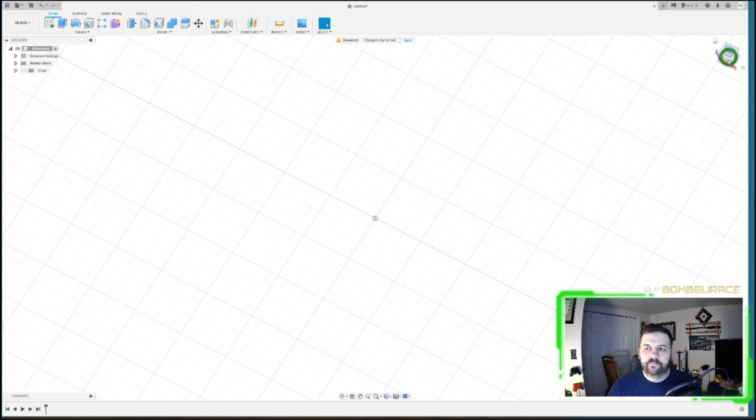So part 1 is just focusing on the sketches. Right here you probably would have came in with it looking like 360. We've got this cube on the right, you can switch and move anywhere you want, but again we're just focusing on the 2D sketch right now. So click the top, you need to rotate it whichever way you want. It doesn't really matter, but click top, and try to keep it relatively the same.

Come over here to our design side, we're going to create a sketch, and this brings up the X, Y, and Z panels. But again, we're just going to be on top, so that's all that matters. We're going to click that button, and that gives us our plane where we're sketching on. So then up here shows all the sketch features we have, anything we can create, modify, and constraints.

So I'm going to teach you everything that we need to know for our design today.

We're just going to start with a line. While we're here, Fusion 360 does a really good snap grid feature. You can turn it on or off, however you want, but it'll snap on each one of these points on your grid line.

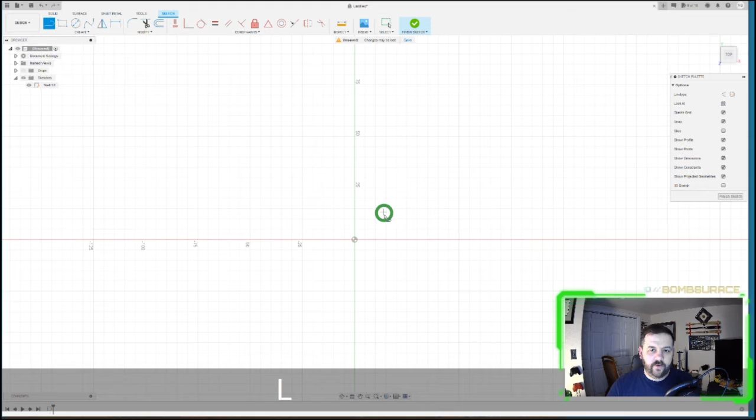So I just leave it on for the most part anyways, as we go. So we're going to start with just a line. Now a lot of these have some hotkeys to them too, and some of them don't. Like line, you can click L, and it'll automatically get the line function, and it works exactly like a line would. You can have these constraints in there. Say if you want a 50 millimeter line, and you want it to be 45 degrees. Boom, that gives you 50 by 45.

Now, if you want that line changed, maybe you want it at 75.

Boom. Maybe you wanted it 30 degrees, works out that way. So when you're making these constraints, you can always adjust them.

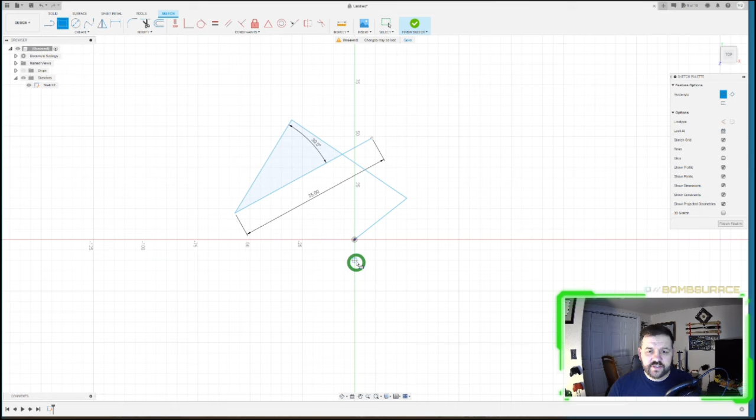Same goes with the box. Click here, I'm going to make a box. Maybe I want it 50 by 100. Boom, box. Same with circle.

Going to snap to point, going to make kind of a circle. I'm going to make it that randomly big, why not? If you ever need to inspect how long one is, hit that inspect button.

Come over here, select. Select the line. I'm not sure why it's not measuring. Never mind, delete whatever that was.

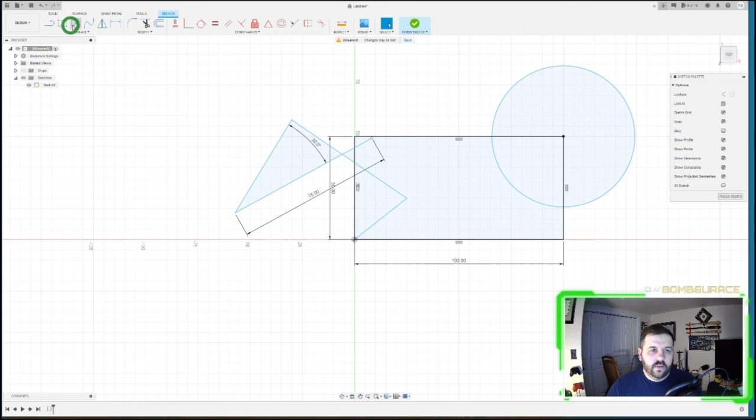So those are the basic shapes. We can also use our splines, which we're going to use later. And this gives you a nice curve.

So when you're using more wild objects or different objects that just need some extra pizzazz to them, splines are going to be your friend, super big friend. Come back in here, reselect, and shape it.

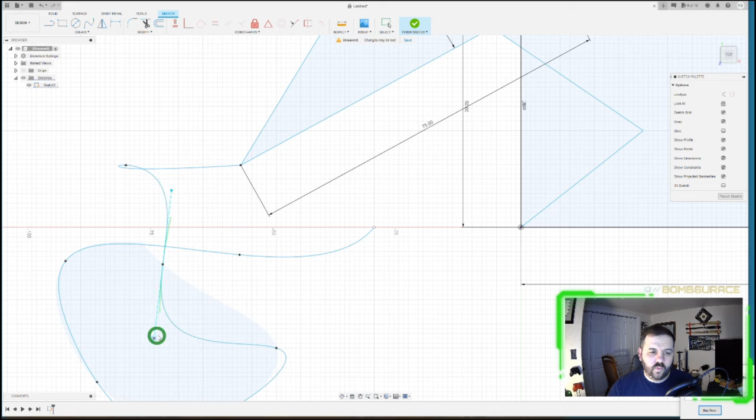And shape any one of these that you need to. Shape the length of the curve, width of the curve, everything. Again, those basic shapes are good.

Now say we have an object that has a face. Think like a face, and we want that same face on two things. Like, let's take this triangle, for example. I want this triangle exactly the same on the other side.

Now I can measure it and adjust, or use a nice little mirror feature. I'm going to select the mirror line first, which I want there. I'm going to select the objects, which I want there and there. I'm going to hit OK. And that mirrored those exact lines how we had it.

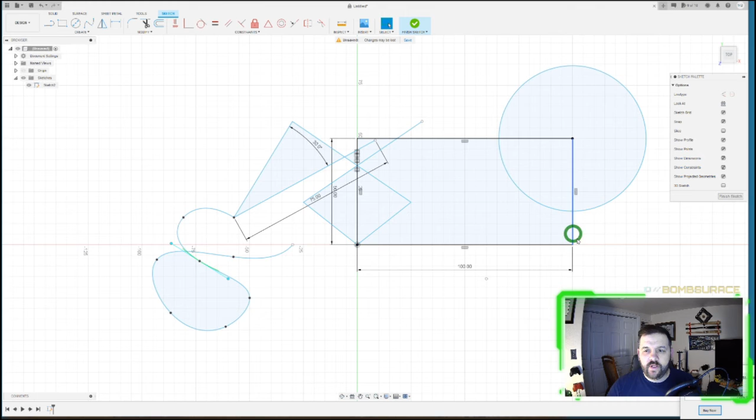Perfect. Say when we did a square, I want the edges rounded. Grab that little fillet button up here in the modify, select both edges, and figure out how much of the corner you want. You want to type it in, you want 10 millimeters? Perfect. If you want each edge to do it, we're going to select them all.

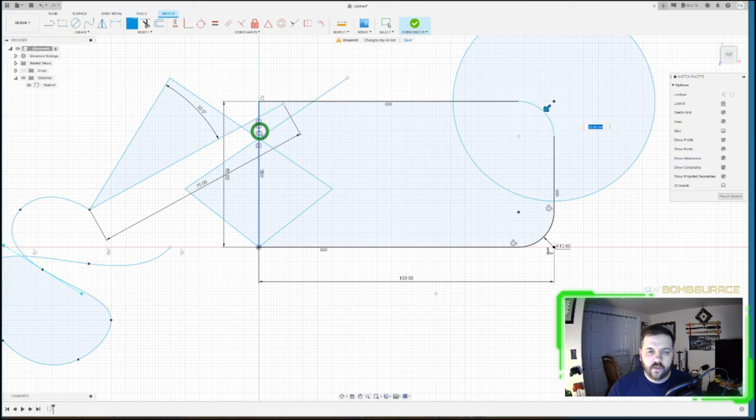So we're going to select one, boom, next set, and last set. I want them all to be 10. We now have rounded corners and rounded fillets. Perfect.

Say we need to trim stuff up. You drew all your objects, and we obviously don't need these extra lines, these longer lines, because we had the diamond the way we want it. Hit T, and little red marks will show you what you can trim.

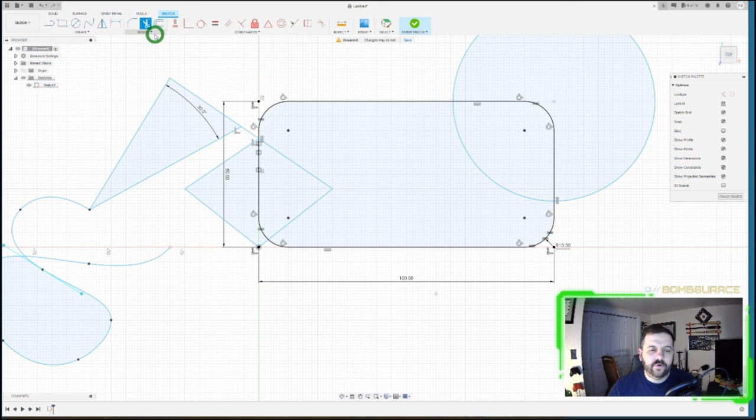So what I recommend is just coming in here and playing around. The easy thing you can do is just come in here, straight sketch panel, and you're just going to sketch anything, whatever object size you want, whatever curves you want. You want to come in here and get an arc between these 2 points. Match it, take line, draw between 2 points.

Hit T, trim that line out. And boom, almost looks like they're overlaying. So it's pretty much whatever your imagination wants to go.

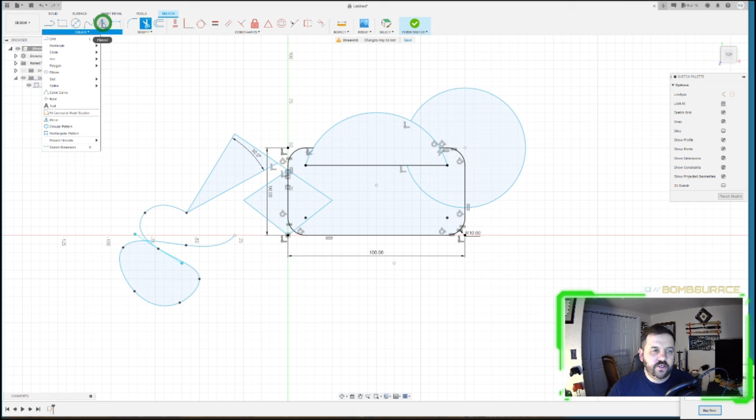But just get used to all this, the mirror functions, all that. There's a lot more to it than just that basic, but for now, we just need lines, splines, circles, offsetting for the O, again O, mirror function, and line. And those are your basic sketches.

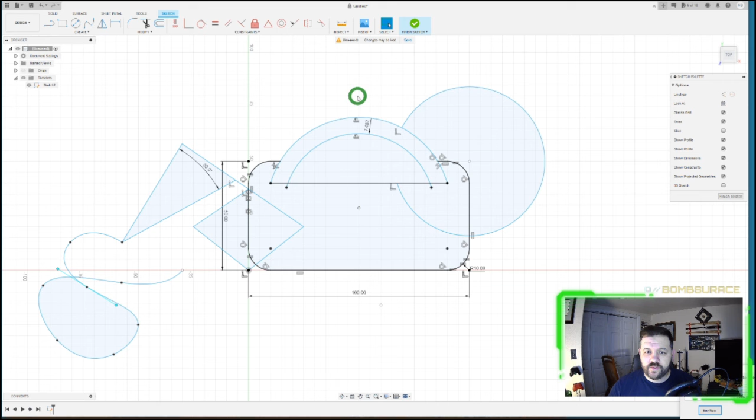So now that we have that under our belt, again, play with that as much as you want. Save it if you want to, delete it, no big deal. And we're going to go to part 2 once you're done playing, and we'll see if we can use what we just learned and looked at to build the coin.